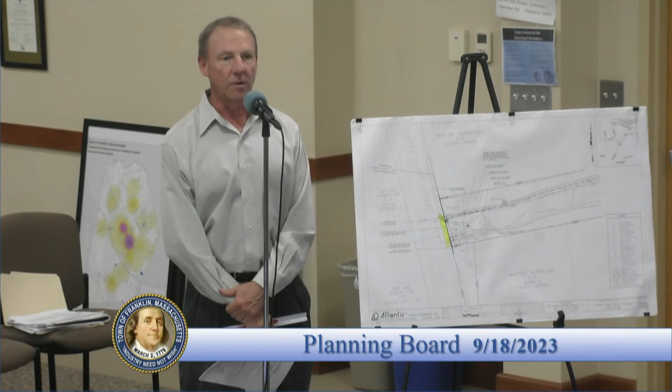Looks like the applicant's here, who could answer that. If you could just introduce yourself? Sure, it's Rich Tabazinski with Atlantic Design Engineers. The stone wall that's there isn't really a very manicured stone wall, it's basically a bunch of larger boulders and rocks kind of piled up together. So we can take those and create a radius on each side, kind of like an entrance for the project, to keep the scenic road itself. That's definitely no problem. Everybody else is on board with it?

I mean, if it's feasible, if the stones aren't workable, then that's one thing, but if it can keep with the continuity of the road, that'd be good.

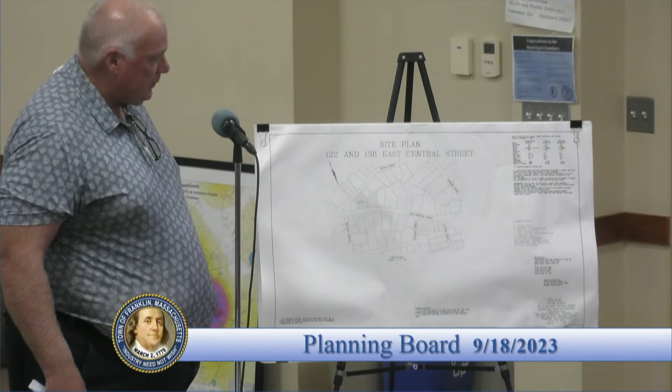A little color up here of the proposed project. So there's an existing building at 122 and also an existing building at 138 East Central Street.

The applicant's proposing an addition here and a reconfiguration of the parking lot here with some regrading and striping to accommodate both building uses. Additionally, the applicant is proposing to remove a significant amount of pavement in front of the building and create these two islands here with landscaping.

Pedestrian access would be via two sidewalk systems on the west and north side of the existing building. Three entry points for multiple tenant spaces would also be available.

We have been before the Conservation Commission. We've gotten comments from them and we're working through those. We've also received comments from the DPW, from the Town Planning Department, as well as from Beta. We scheduled a meeting with Mike Maglio and Gary tomorrow to go over some of the stormwater items, but the basic overview is we're proposing to take the roof from the existing building as well as the proposed addition and put it into an underground infiltration system located to the front of the building. So as I mentioned, we have some items to go through with Gary and Mike just to get on the same page. We're working through the items with the Conservation Commission.

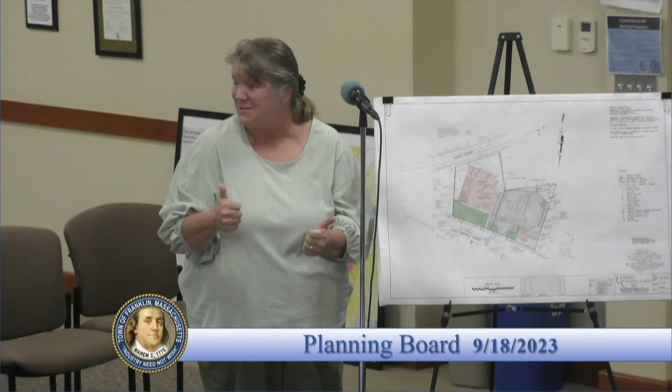But it sounds like it's gonna be good? Yep. Okay, good. Rick, if you want to explain. Sure.

So we've actually proposed grading for the site such that everything's going to be directed towards the wetland from a surface water standpoint. And Mr. Chairman, the proposed trash receptacle dumpster area is located here.

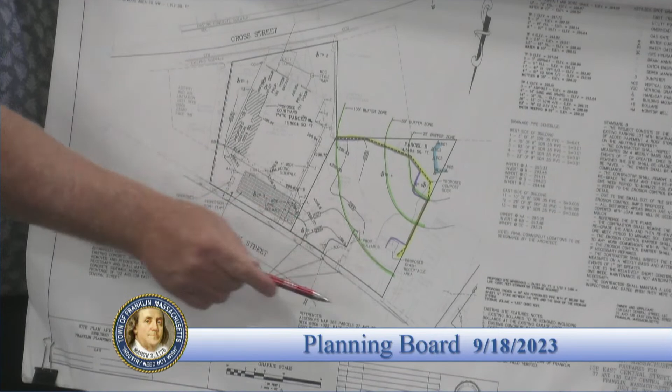Okay, and there is a detail for the chain link fencing with privacy screening around it, on the detail page, just to address those couple of quick comments. I could have missed it, sorry. We tried to hide it, so I guess we did a pretty good job. Well, I saw the pad, I didn't see anything else.

Okay, if you'd like, I can address a couple of the comments. Yeah, I mean, if you want to address the comments, sure.

Just kind of starting with Jen - so 122 as of now is going to remain. We did fully gut it, so it's very nice inside. We have 2 tenants in there. So that's the game plan. I think once this site is kind of restored, that place will look a lot nicer too. It's kind of surrounded by all of this at the moment. Yeah, but like I said, we've fully renovated that place inside last year. So as of now, the plan is just to keep that the way it is.

As far as the connection goes, just echoing, there's a lot of nice vegetation over there. I'm not sure exactly what they are, some type of arborvitae hedge maybe. It's really thick, it's really nice. So we just kind of kept it the way it was without trying to disturb too much. As far as someone driving a car through there, they'd really have to go through the tree, and it would be an effort. I'm not sure how nice they'd make it on the other side, but that was the whole thing, just to kind of keep it the way it is. If not, we rip up the asphalt and put dirt there, or mulch, under the trees. So that was the thought process.

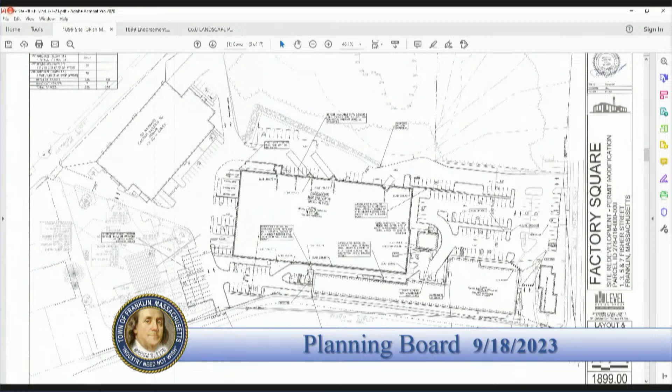The only other large part of this was the large parking lot at the back of the site, adjacent to the residential area, that's currently a field. That's going to be able to remain a field and green space for the foreseeable future, because the uses are no longer going to be as parking-intensive as we originally planned. Overall, we're able to decrease the impervious surface on this project as well.

I will just make one general comment: I'm not in favor of the stacked parking. I would prefer to see more of the open parking lot utilized, as was originally on the first drawing. I'd say take those spaces and incorporate them in.

I'm not sure about the rest of the board, but let us explain how we came up with that. PCI, the company that's expanding and already on the site, is going to have that stacked parking exclusively for them. They have shifts, so the idea is just to stack them in with shifts. Of course it would be better to do it the other way, but you're saving some time and money this way.

This still gives you the opportunity to add a little additional parking as needed. Right, we figured we could always do the rest of the parking if we needed to, if uses change over time.

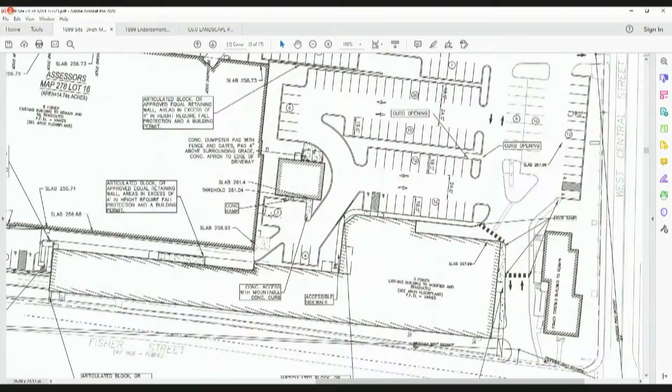Has the fire department seen this? I haven't seen anything from them either. Has Amy? There was a letter. Did they call and we spoke with them as well? Can we get a follow-up comment from the fire department if we could?

Dumpster pad location - is it in the original spot? No, it was moved. Can you just show it on the drawings? The note says concrete dumpster pad with fence and gates, pad 4 inches above surrounding grade. It's okay, right behind, but it's not marked as it should be. Can you mark it better? Can you make sure we have that address?

Also, handicap spaces and parking, if you could - it's kind of hard to see because there's so much on this drawing. I see one on the right-hand side of the site, one in the center of the site. What about the back of the site? I don't know if there's any additional handicap spots at the rear of the building. I didn't see any against the entrance - if you can just take a peek at that.

As well as we have the trailers lined up, do you have parking spaces overlapping them? For the tractor trailer parking, yeah, in the rear of the site you have trailers, and then you have parking slash right through them. Correct that if you can, and whether it's gonna be one or the other, because that's gonna determine how many parking spaces you have there.

Dumpster pad, fire department, handicap, back of the building - I mean, there was a lot of changes for the site itself. Okay, that was kind of my bullet list, but I just want to hear back from the rest of the board if they have any comments or questions.